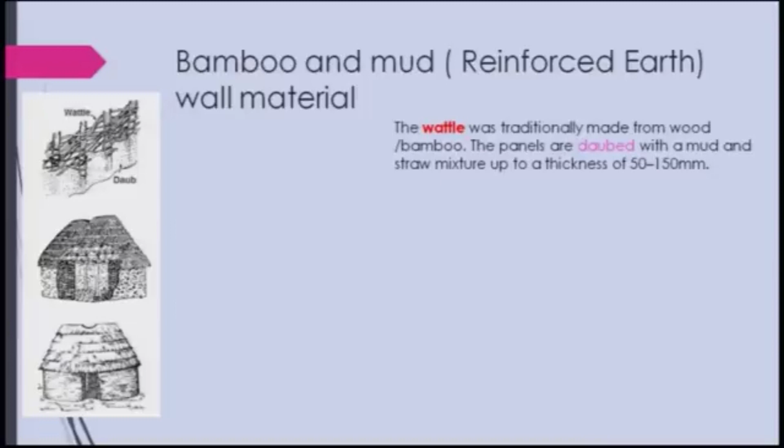Wattle is traditionally made from wood, bamboo, or other sticks which are available plentifully in that area. The panels are daubed with a mud and straw mixture up to a thickness of 50 to 150 mm, depending on the requirement.

This is what I am showing. Of course, here these are bamboos, and it can be cane also. This can be made of cane, any other reed you can think of, or any other materials.

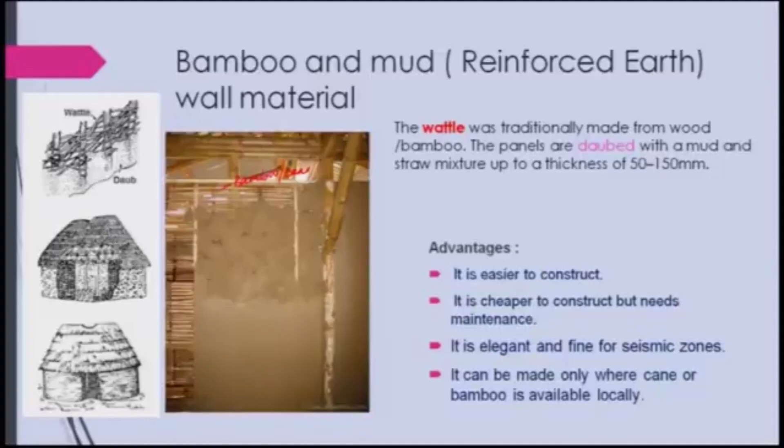The advantages: it is easier and cheaper to construct, but needs maintenance. It is elegant and fine for seismic zones, and it can be made only where cane or bamboo is available locally. You need not transport material, since transport cost is very high. Here you can have it in your own backyard if you can grow it. Bamboo grows in 2-3 years, enough to make your house, and even if you take one bamboo out of the tree, it will not spoil. That is the best part of bamboo.

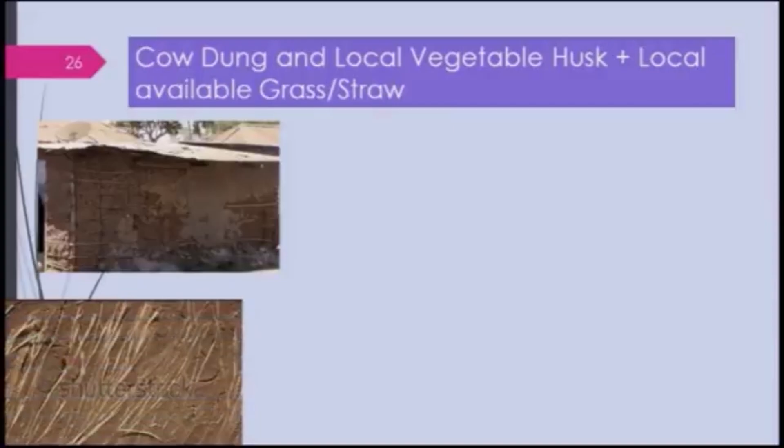Cow dung and local vegetable husk, grass and straw can be used, as shown here, along with the mud. They can use local materials, and this rice husk is being used. This is basically rice husk.

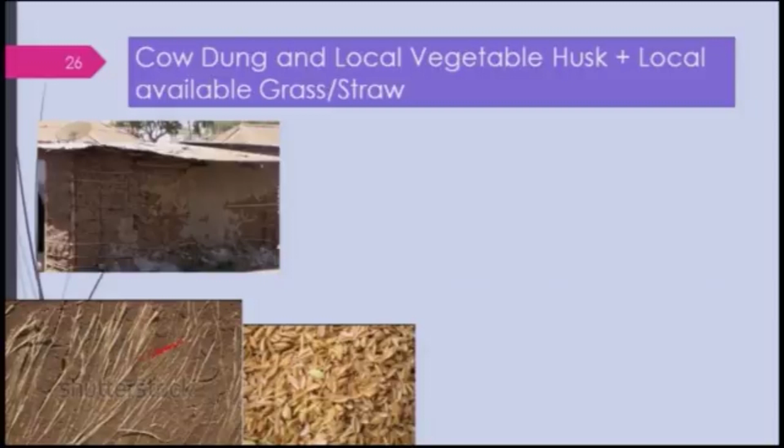Rice husk is a good insulating material. It is generally applied to the outer layer of mud plaster because it is water repellent. Even if water falls on it, it will not erode the mud. That is why rice husk is used very much.

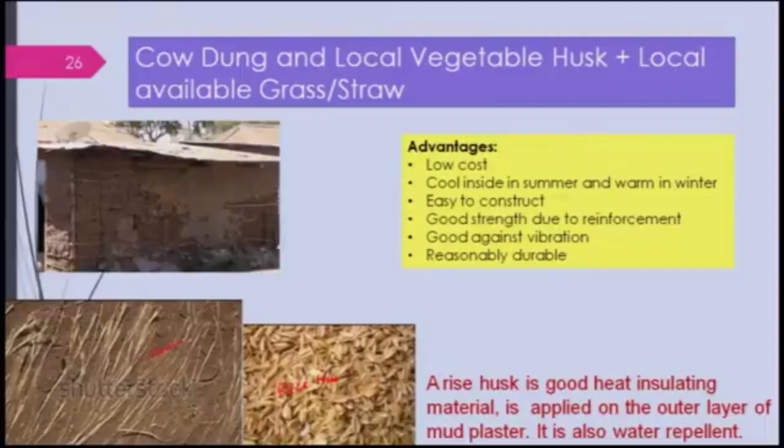Of course, the advantages are similar: low cost, cool inside in summer, warm in winter, easy to construct, good strength due to reinforcement, good resistance against vibration particularly in earthquake regions, and reasonably durable if you add sawdust and other local materials. Disadvantages: it can disintegrate if there is permanent moisture issues particularly in coastal areas, and it can wash out in floods and is fire susceptible.

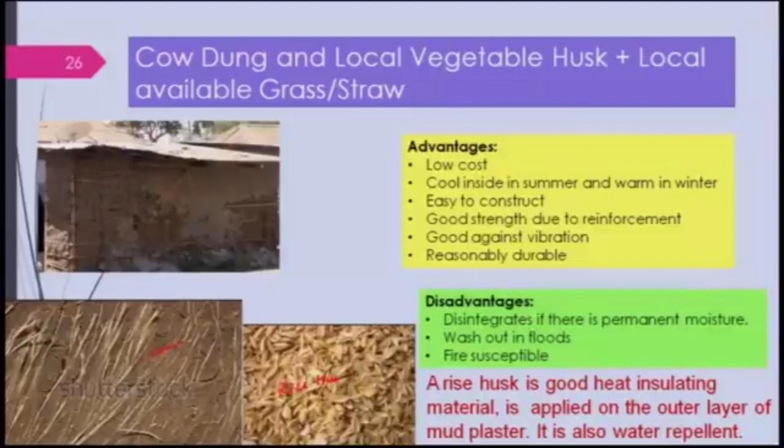That is the one bad thing, but when you use mud it will not affect that much.

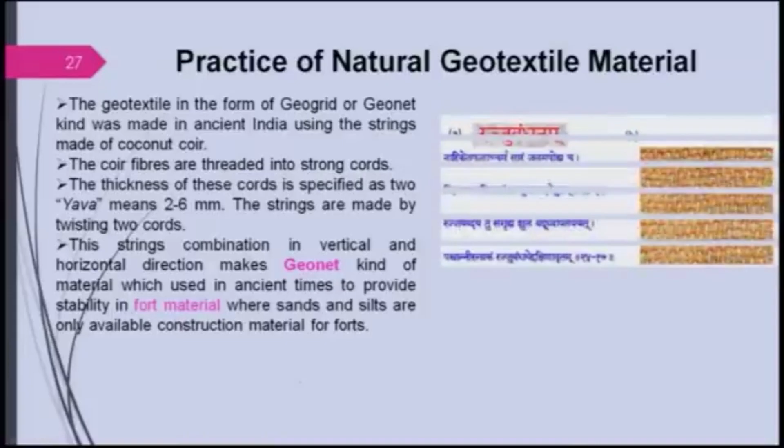There is a practice of natural geotextile materials, in the form of geogrid or geonet, used in ancient India with strings of coconut coir. These are nets made out of coir, where the coir fibers are threaded into strong cords, which can be 2 to 6 mm. This can be used horizontally, vertically and otherwise, and was used in earlier days even in fort construction.

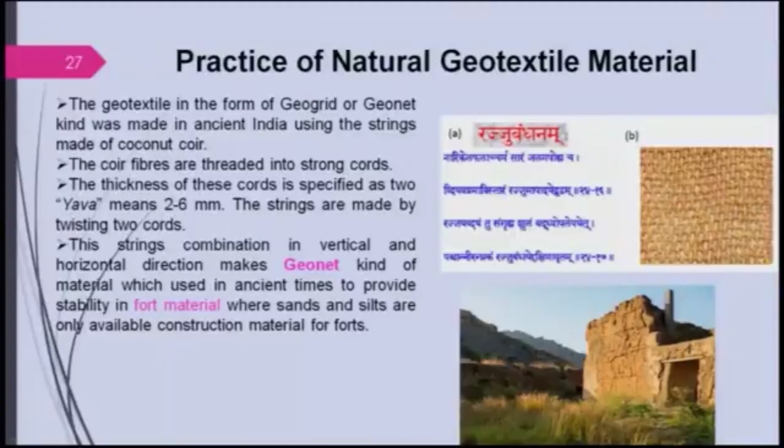This gives good strength and durability, and where only sand and silt are available for construction material and stones are not available, you can use this as a substitute.

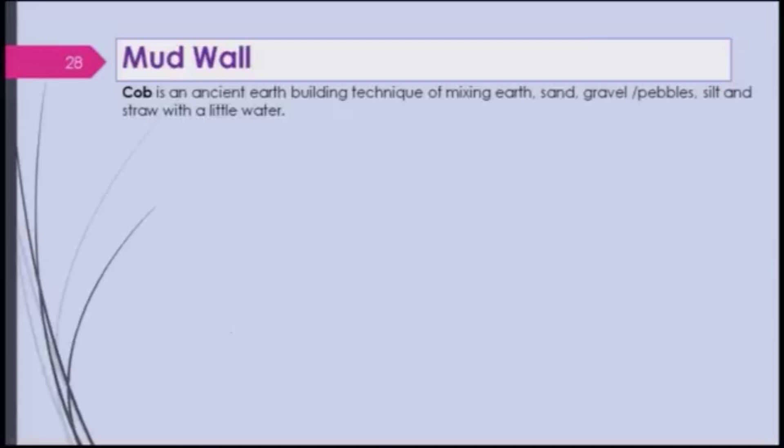Mud wall is basically an ancient technique, also called cob by some people. Cob is an ancient earth building technique, mixing earth, sand, gravel or pebbles, silt and straw with a little water. The proportion is important, and I have shown you this mud wall. This house is existing today in UP, from one village I visited. They have made a very good house, though there are a little bit of cracks here that one has to maintain.

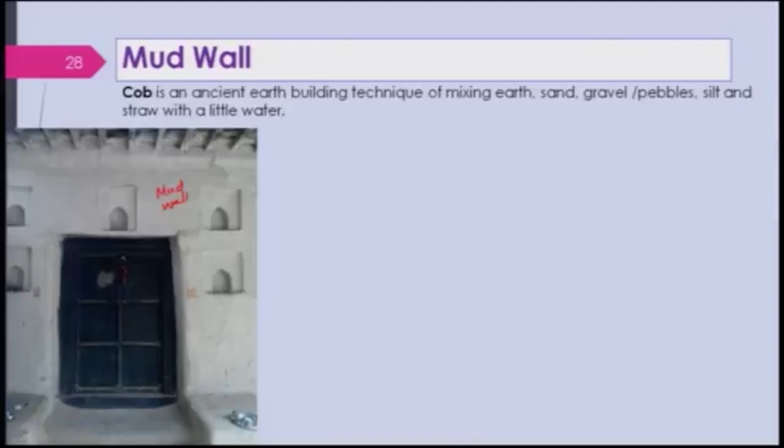And if you look at the good soil for this wall, it will be gravel around 15%, sand 50%, silt 15%, and clay 20%.

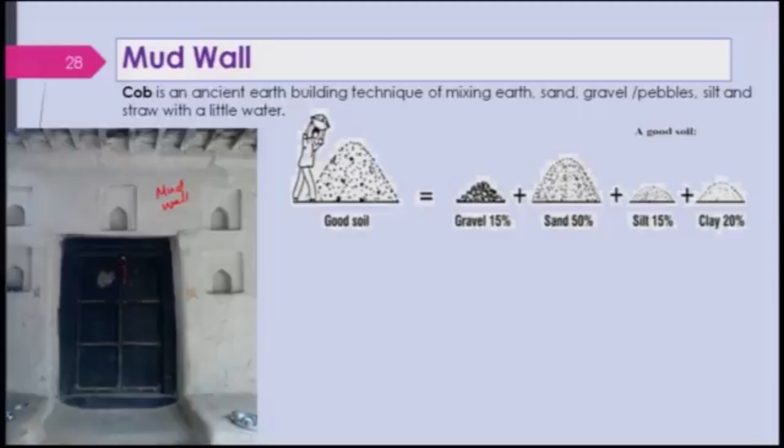But you need not worry about this much, this is of course better if you could get it, but people who are using this will be knowing, they can test it by hand, by their own judgment. Most of us do not know which is good or bad because we do not have experience, but those who are using it also apply judgment.

And it is low cost, if available locally, and less skill is required, and appearance is aesthetic and natural, that is a good thing.

And I will show you also how we have improvised this wall, with structural capability, heat and sound insulation, fire and vermin resistance since mud is good and will resist fire, and durability and moisture resistance, unlike bamboo and other things which are problematic.

And it has breathability, it can breathe moisture and air, and is less toxic in nature. Because if you look at modern days, we use paints that are very toxic, and we are not aware of it, but mud keeps the room cool and healthy.

And of course, disadvantages: less bonding between the mud and big pebbles if you are using them, so you will have to use the proper size of pebble, not easy to handle after a certain height. But if you look at history, particularly in other countries, they have built very big houses, even 3-4 floors, and big mosques in Iraq and Iran, though these can be affected by flood and torrential rain.

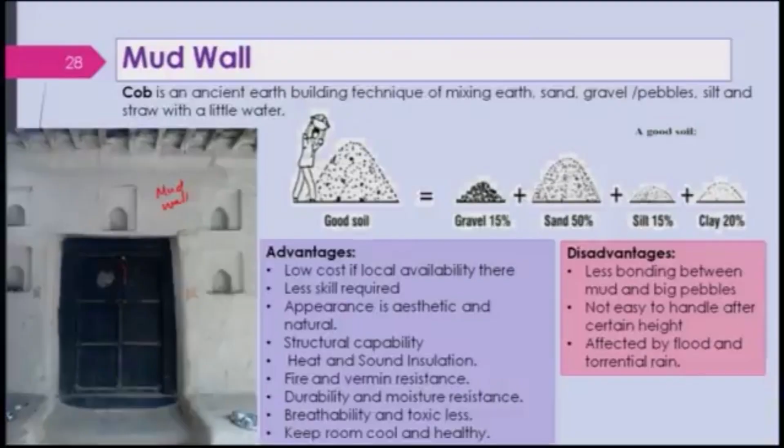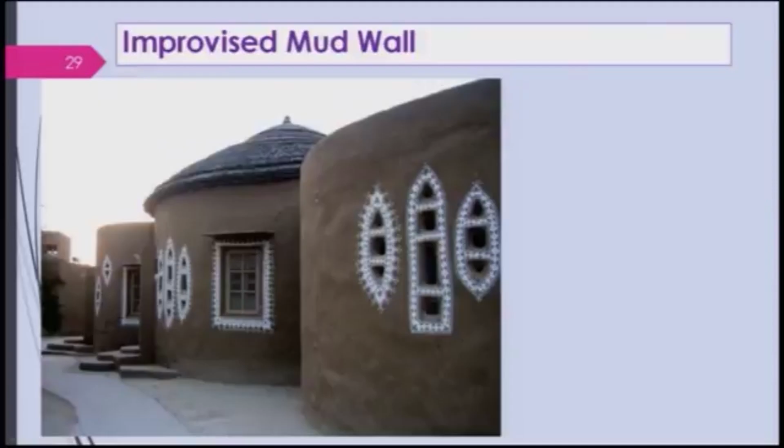Let us look at the improvised mud wall, which you can see looks very nice, and of course they are using some binding material here, one can use Portland cement, and also one can use lime and other things.

I will be also talking about the compressed wall a little later on, where you can get very good strength and stability. This is another one, interior and exterior, you can have nice things, you can't think that this wall is made out of mud today.

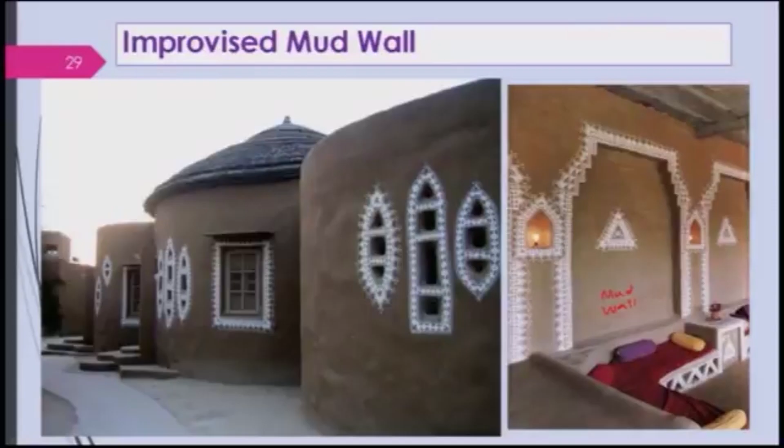So what I want to emphasize is not that we will just look at them, but that we can improvise and use it today. That is the point we should learn from this lecture, and from our ancient wisdom.

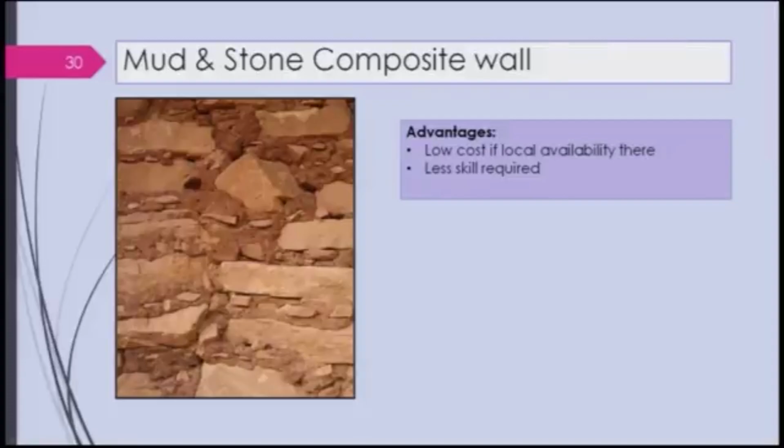Mud and stone composites, you can have stone joined together, but these are not sized stones, they can be any size. I have shown this as one way, but it is not good, you should have a proper size, and then you can use mud as a mortar, a joining or binder, which is low cost if locally available and requires less skill.

And the disadvantage is less stability against vibrations and other things. History shows maximum failure during earthquakes because these are not very stable, but if it is stone, at least it will be stable.

Properly dressed stone, properly placed with certain weight, like your temple structures, but these are not like temple structures. For temple structures there is a proper standard maintained, but here there is less bonding between mud and stone, and it's not easy to handle after a certain height, because different shapes and sizes of stones are being used. So that is not really a very good one to adopt.

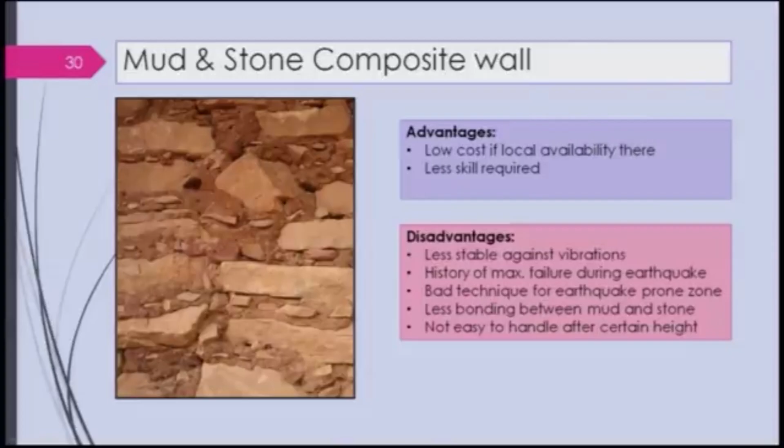So let us look at roofing materials. Roofing will be of several kinds: thatched roof, bamboo or wood roof, stone and brick roof, handmade tiles, bamboo corrugated sheets and other materials. There are several kinds, and it may vary from region to region, and what I am showing is just the tip of the iceberg.

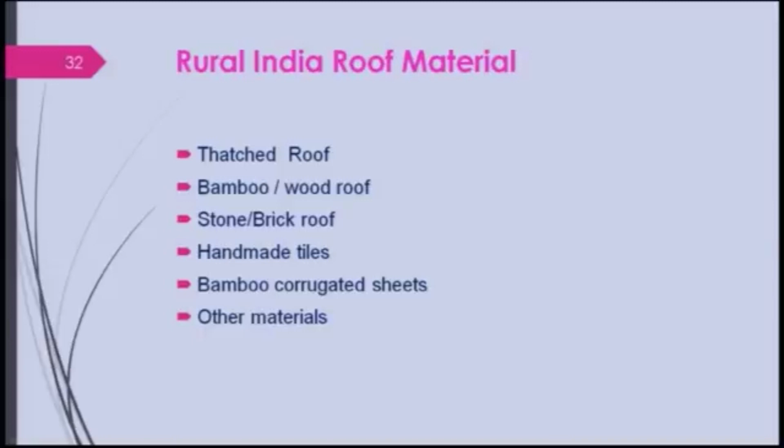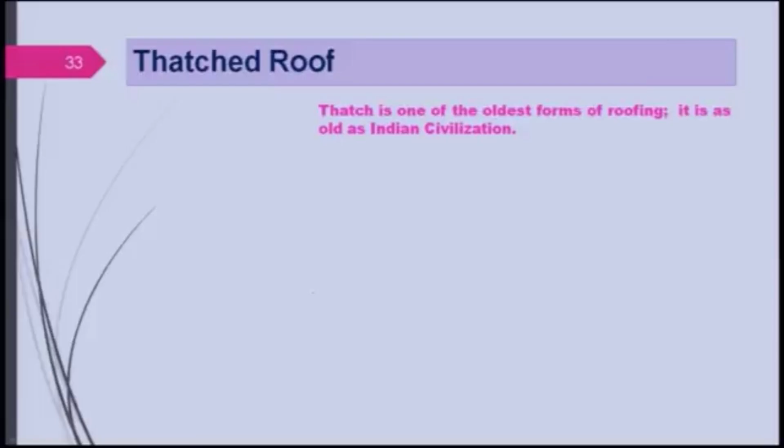There are several things in this country, and thatched roofing is one of the oldest forms. According to me, it is as old as Indian civilization, and we will see this later when we talk about town planning. This is one kind of thatched roof, basically a roof covering made of dry vegetation like straw, palm, water reeds, and other natural growth.

And it is a very old roofing method, has been used both in tropical and temperate climates like India, because it is a good insulator of heat, and is not very popular among people in recent times because of two factors. One is that people are very much interested to have a pakka house, that is the concrete house, and maintenance is very high in case of a thatched house unlike concrete.

Besides this, today it is more labor intensive, and even the straws are not easily available because it is costly. The advantage, of course, is when it relates to agriculture, then it is economical, lightweight, and a bad conductor of heat. But if you want to buy the straw from the market, it will be costlier. Also, people skilled to make this house are not available today. The disadvantages are: fire susceptible, less durable, and it needs to be changed periodically, maybe every 3 to 4 years, or sometimes 5 years.

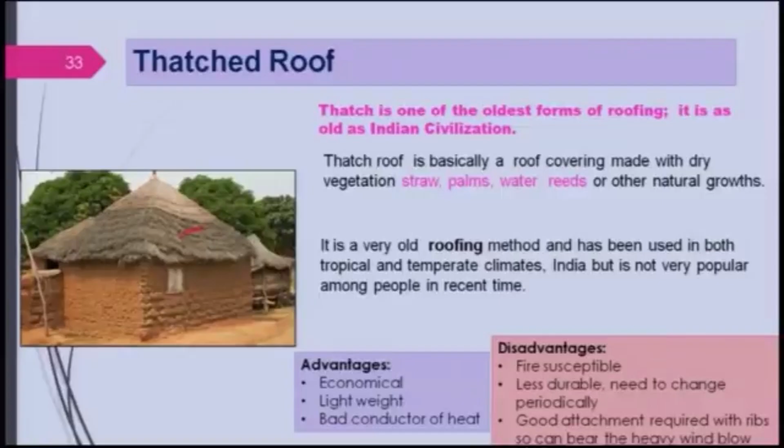Good attachment is required with the ribs so that it can bear heavy wind blow. Let us look at the basic principle of making a thatched roof. Of course, you need to have a truss, made of bamboo or wood, and it has to be done properly and designed correctly to take the load.

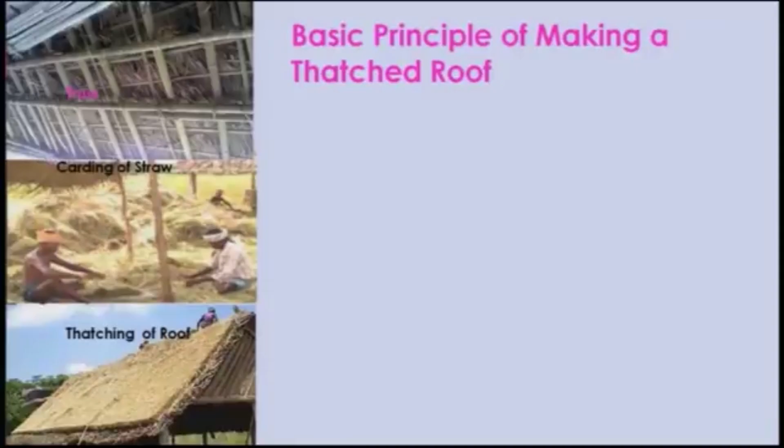This is the carding of the straw - you separate it and put it in place, and this is the thatching of the roof. A thatched roof must be as simple as possible. It should have the ability to adapt to free curve shapes - suppose you are having such a design, you can achieve that.

Thatch around 80 to 150 thick was used in earlier days, depending upon the rain, torrential rain, and other factors area-wise. The average cut length of the straw will be around 700 mm. Of course, you can manage with a lower length, though bigger will be better - the labor cost will be reduced.

The design of the truss will depend on the straw length, because the spars you will be putting, their interval will be decided by this. The straw bundle used for the roof must be strong, supple, and able to resist the effort to break it by twisting a handful continuously. Therefore, people use some kind of tie and then put it in place.

If you look here, these are the poles. Poles should be around 50 to 100 millimeters diameter, spaced around 400 to 800 millimeters apart, depending upon the design of the roof and also the truss. If it is very heavy, it will have to take the load. If a wall is there, the wall will take care of it, but in some places you don't use a wall, you use poles instead.

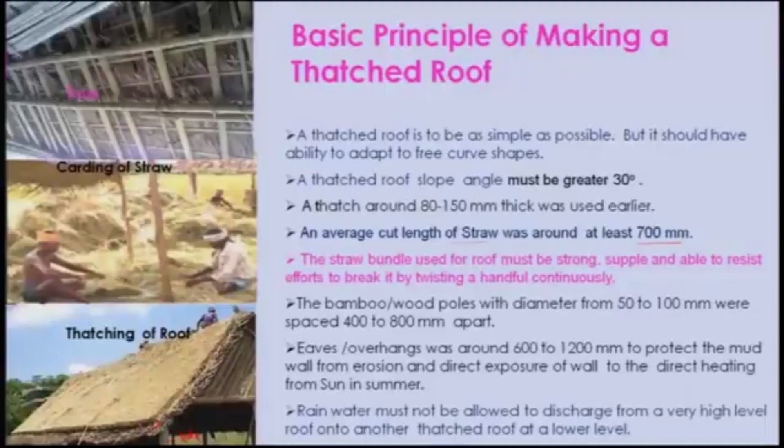Let me tell you, people designed their houses in earlier days in such a way that the height of the thatched house would prevent the summer sun particularly from entering the house, one roof over another - that is a beautiful thing which I had seen somewhere. When I inquired, they told me that as the sun moves, the shadow will fall on another roof, so that it will not be heated as much.

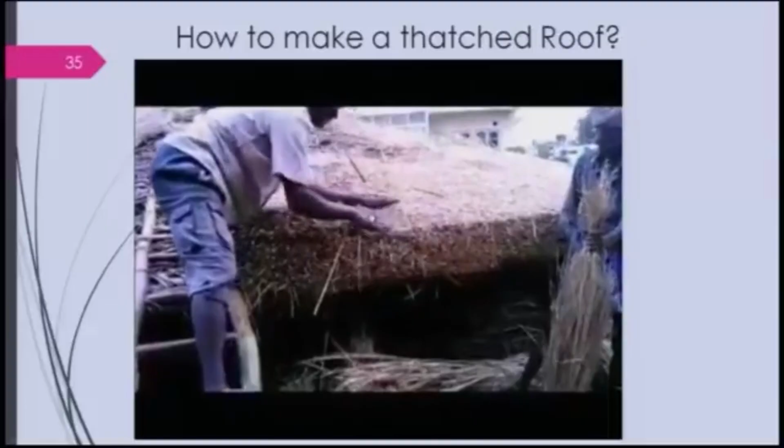This is the bundle of straw, right, and depending upon the length required, which will be dependent on the distance between two spars, which is not shown here. And unfortunately, the people who are skilled enough to make thatched houses are not there today. So, that is the problem today.

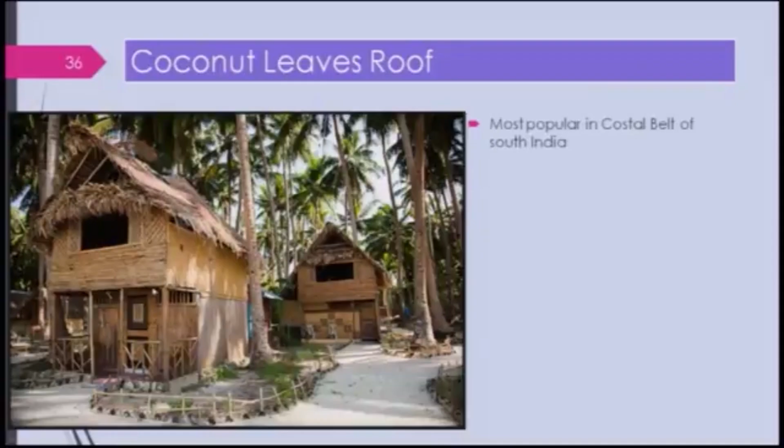Of course, there are several other things like coconut leaf roofs, which are being used particularly in the coastal belt of South India. If you look at this, a 2-storied building having a coconut roof here, and here they might be using wood planks or maybe a mud roof, and mud timber flat roofs.

Indian mud roofs are normally flat with mud bricks on supporting platforms of wooden planks, reeds and bamboo matting, palms, or even coconut leaves, any matting you can use, right. And sometimes people also use brick and mud, apart from wood planks.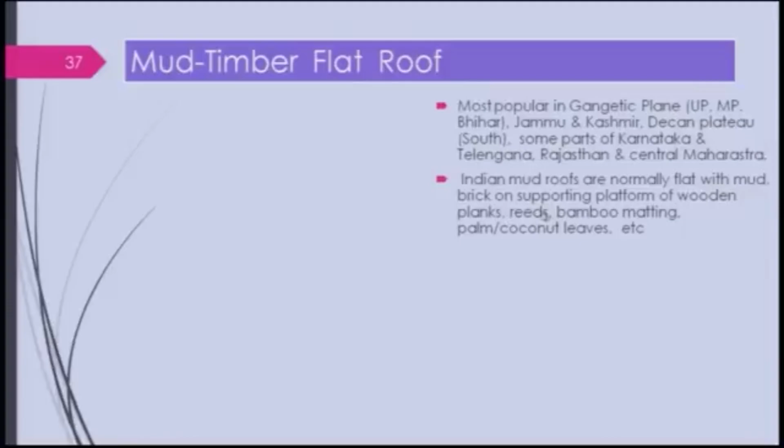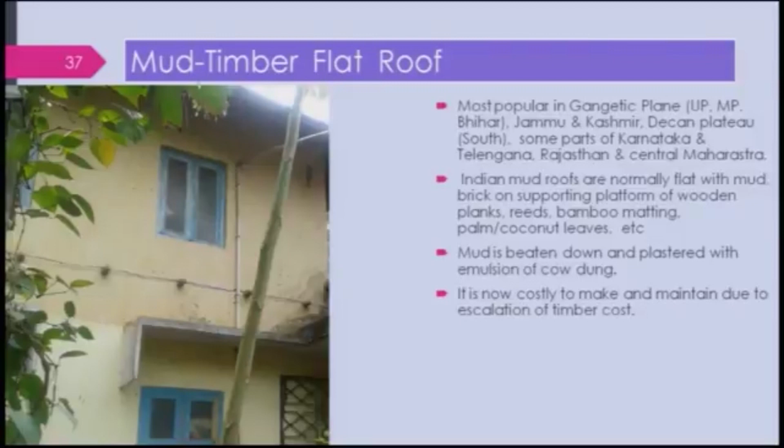And let me show you a house here. This house is around 40 to 50 years old. My student who is residing in Trivandrum sent this; it is his own house in a rural area, and it has been modified later on. The roof is basically a mud timber flat roof, right.

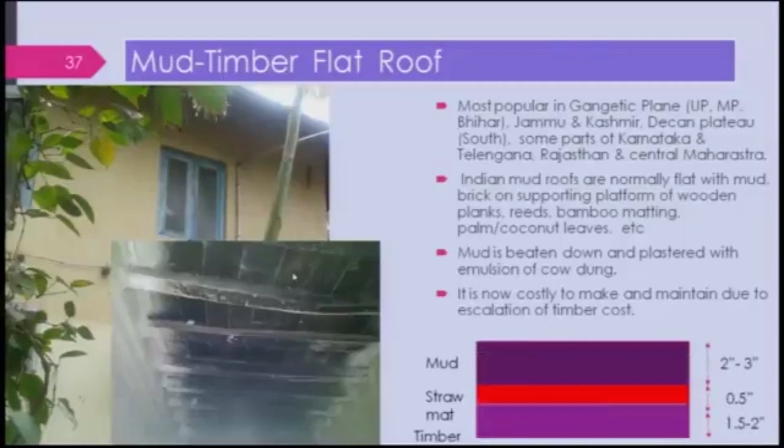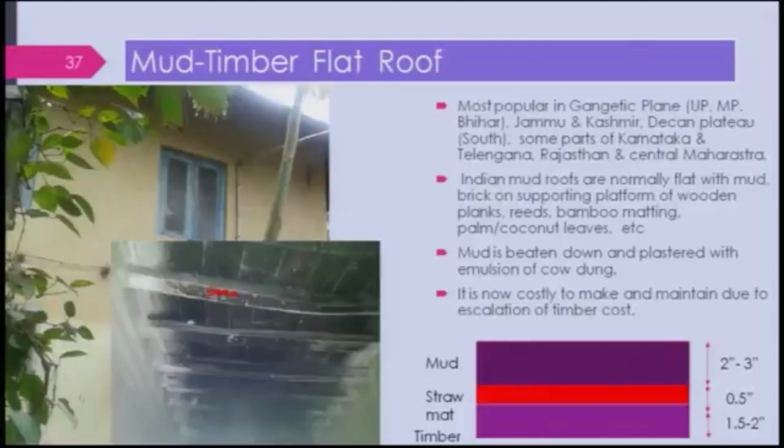If you look at this, these are the planks, and this is the beam. This is your beam here, and these wooden planks are used. The timber or wood plank will be around 1.5 to 2 inches depending upon the load coming on it. It may be more than that; I have shown it as typical.

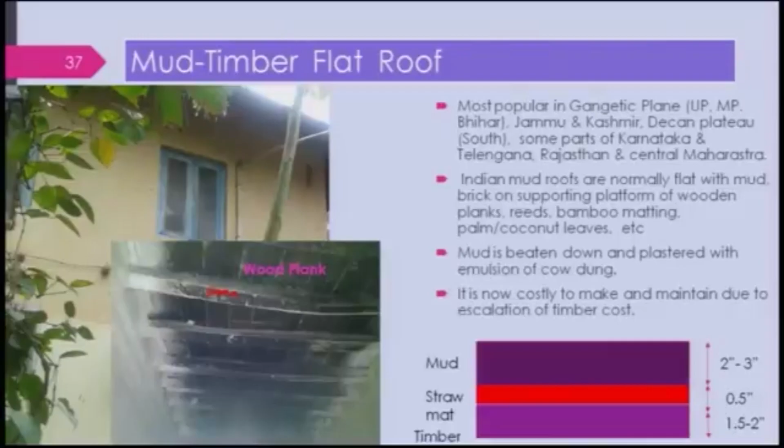And there is a straw mat or maybe bamboo mat given, such that it will soak any water passing through the mud, because in the rainy season the mud may absorb some water. So the timber should not get affected by that. People say its life is around 100 years, and some even claim more than that. I do not know, and I did not get any data.

Let us look at the advantages of using a mud roof over a cemented roof. Mud is a truly natural, cheap and local material, and it provides excellent heat insulation; the internal part of the house is cooler in summer and warmer in winter. Its life is around 100 years. I have talked with several people and arrived at these years, whereas the life of a cemented roof is around 50 years, cement you have to buy from the market, and it is poor for heat insulation. It acts as a heat source.

You might have observed when using the ceiling fan in summer, a lot of heat comes from the top towards your body, and it is unfortunate we are using that ceiling fan. Instead of cooling ourselves, we are taking the heat from the cemented roof and bringing it down. It is foolishness to do that. One has to have a false ceiling, so that this heat does not come, but we are not using it. Then after that you use the ceiling fan.

Also, the mud in a mud roof can be recycled, and so can the planks and other things; it is reusable. Concrete can be used one time, and it uses a lot of energy. For mud, no energy; you just dig it and use it, or use mud from ponds or other places. Concrete cannot be recycled. Dismantling cost is low, but for a concrete house dismantling is very costly, and construction cost is very low because any ordinary person can do it.

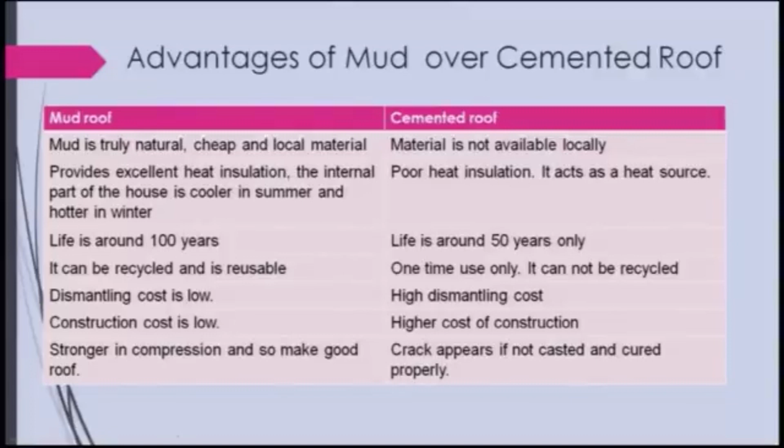Here you need a specialty, a higher cost of construction. Mud is stronger in compression, so it is very good for the roof. That means mud is a very good material for the roof, whereas in the cemented one a crack may appear if not properly cast and cured, and also the cost of construction of a concrete house or cemented roof is very high.

And of course, there will be disadvantages. Mud is eroded easily by water, mud has low strength, like it behaves poorly in the event of earthquake, and of course, cemented, if you compare, it is good resistant to earthquake, provided it is not very severe, low range Richter scales. If it is low, one can manage. If it is high, then it will be devastating.

And high maintenance is required; after certain intervals of years, one has to maintain the mud roof. And so also the concrete one can do, otherwise seepage will be a problem. And mud soaks up rain water and becomes very heavy, and of course, cemented roof won't soak the rainwater.

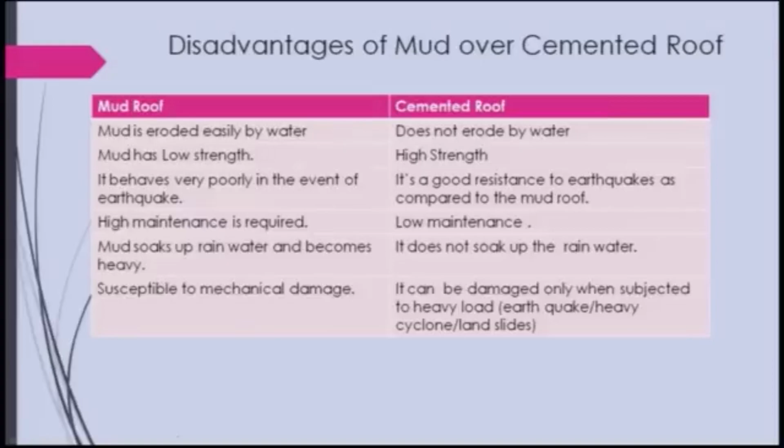And mud roof is susceptible to mechanical damage, whereas the damage due to the mechanical forces in case of concrete is not that much, provided the load is not that heavy. Like in earthquake or heavy cyclone or landslides, the load cannot be managed well even by the cement roof. So, therefore, if you look at it, it is having certain advantages.

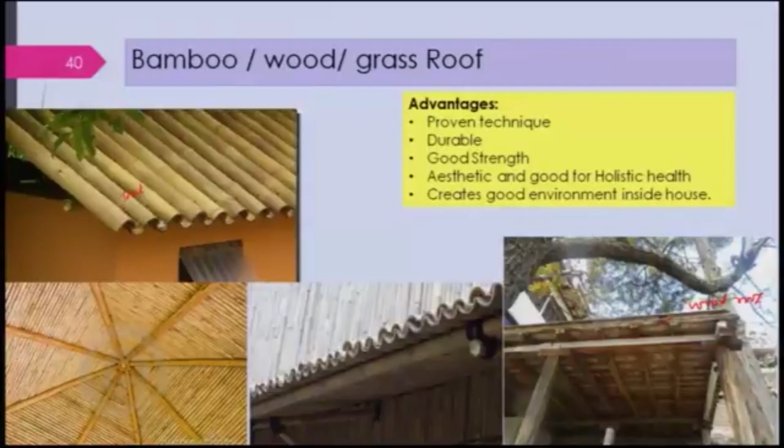And of course, these are proven techniques. It is durable, particularly when you use bamboo. Bamboo should be seasoned properly, that is also important, and it has good strength, aesthetically good, and good for holistic health, and creates a good environment inside the house. You won't feel suffocated by the concrete. So, from that point of view good, and it is biodegradable, that is a very important one, and it is eco-friendly in the sense it is not guzzling energy and creating greenhouse gases like your cement and other things, and also the iron rods.

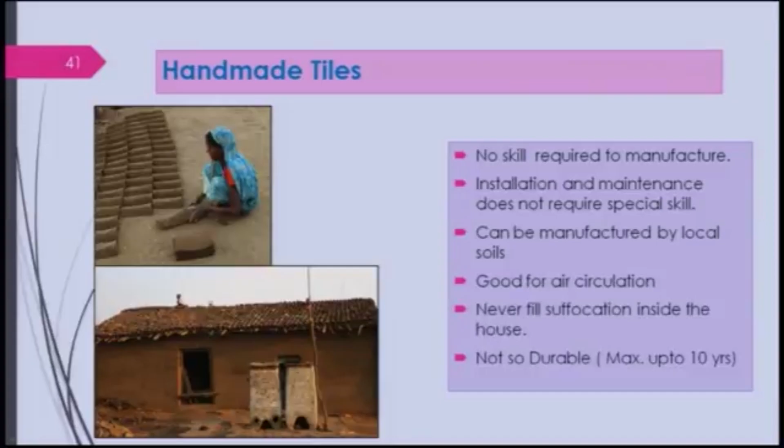So, hand made tiles, if you look at, people can make and dry it, and even they can bake it, and not much skill is required to manufacture. Installation and maintenance does not require special skill. Of course, to some extent skill is required, but not sophisticated skill. Can be manufactured from local soils, good for air circulation, and you never feel suffocated inside a house, and not as durable as concrete, but one can manage up to 10 years.

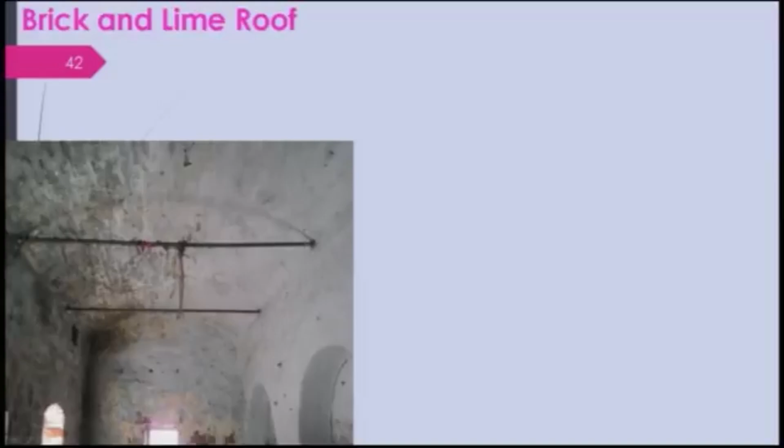And brick and lime roof. I am showing here this roof I have got near IIT Kanpur. Just adjacent to IIT Kanpur, there is a village Nankari. I got this house. If you look at, this is the roof. If you can see, this is an arch here.

Now, this arch is made, and what the person is claiming, this house is more than 60 years old, and it is not maintained properly. It is abandoned, they are not using it, they are going to dismantle it also, and without maintenance they could manage to get 60 years, and it is not in that bad condition from the look. And another question arises: this arch, how is it working?

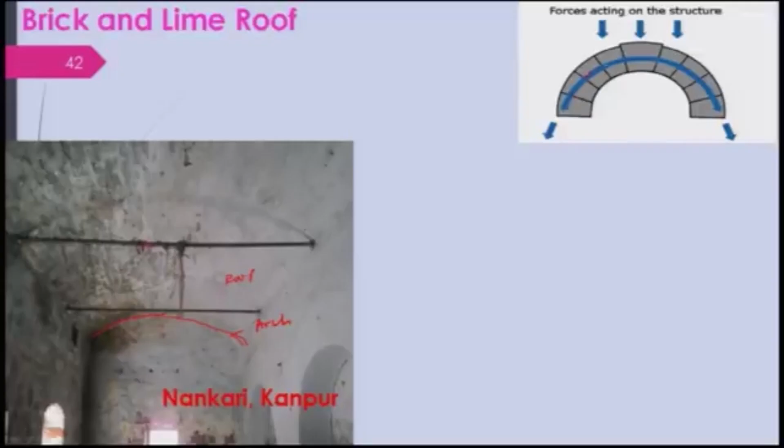If you look at, these are the forces acting on the structure, and these forces are being transferred over here, and this is a very important stone which is known as the load stone or the keystone, key brick you can say here. This will be the load brick.

And the acting forces due to the weight and also the human beings moving around, you can go for a second story building. It results in compressive stresses, because these forces are transferred this way, this is compressing, right, and in turn it eliminates the tensile stresses here nearby where it is being joined. So the force is coming, which is also known as the arch action. Because of that, it remains, and of course you can use these kinds of mortars or binders so that it will remain.

But how they might have made it? Keep in mind, this is a very large arch here, this is a very small arch here. What they could have done, they could have made a frame like this beforehand, and the frame could have been a truss kind of thing joining, so that it can take the load, and then they could have set these bricks. Keep in mind that these bricks should be a proper size, that is very important, such that the center of this will be matching with this radius. That is the important point one has to make.

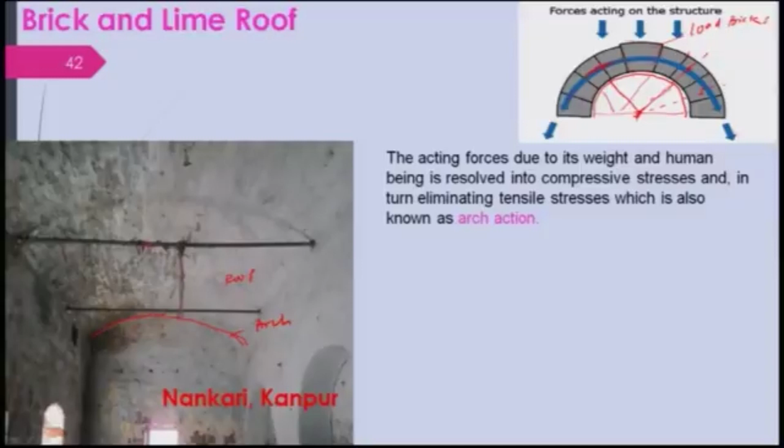Brick making and putting requires a lot of skill, and each brick has to be looking at whatever load will be coming. And this is the house which you can make with brick and lime; you can make a 2-storied or 3-storied building, people have used it. And there is another one I happened to see in Kanpur, again in a dilapidated condition, by the side of the Ganga, in Shivrajpur.

This technology is a little different. In this case it is a vertical arch, and this is the horizontal arch. If you look at it, these are all arches. Horizontal arch, right. And how it is working, they might have used a frame kind of thing, and if you look at the center, there will be some center here, some other place not shown here, and the brick size has to be properly maintained.

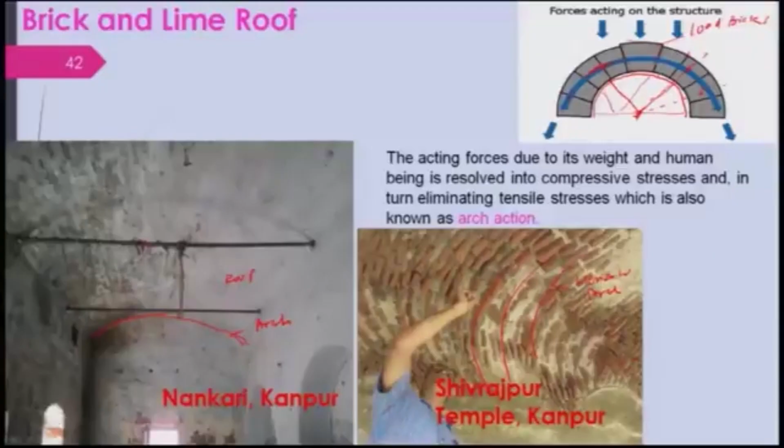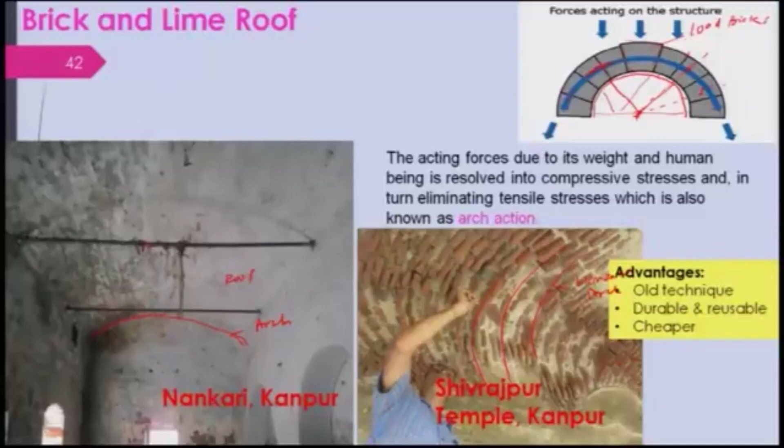So, therefore, it is very important to see that this kind of technology can be revived such that it can be used even today without resorting to concrete, and lime is far superior as compared to Portland cement, because you can make it locally and use it, and from the heat transfer point of view it has better properties. The advantage is it's an old technique, durable and reusable, and quite cheap to make, but the skill is not available today with the people. That is a very important challenge. We can revive this technology.

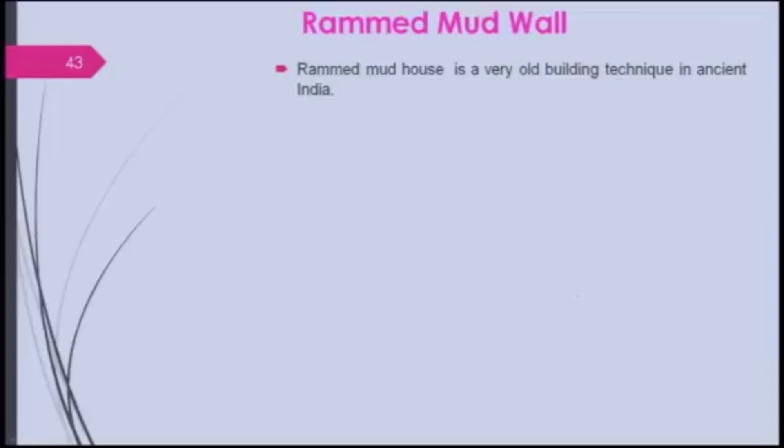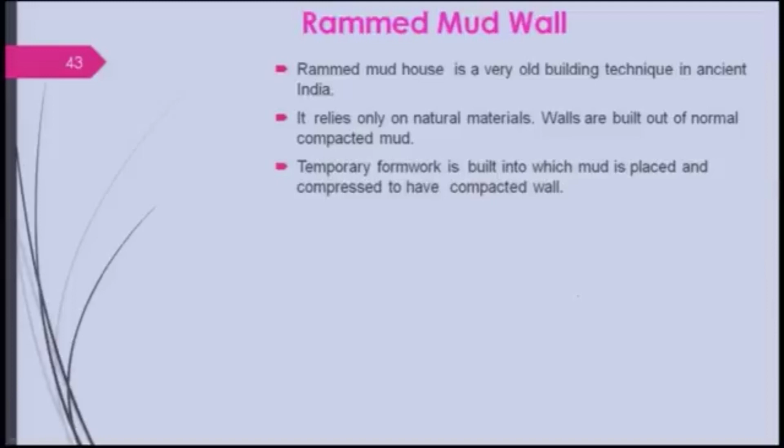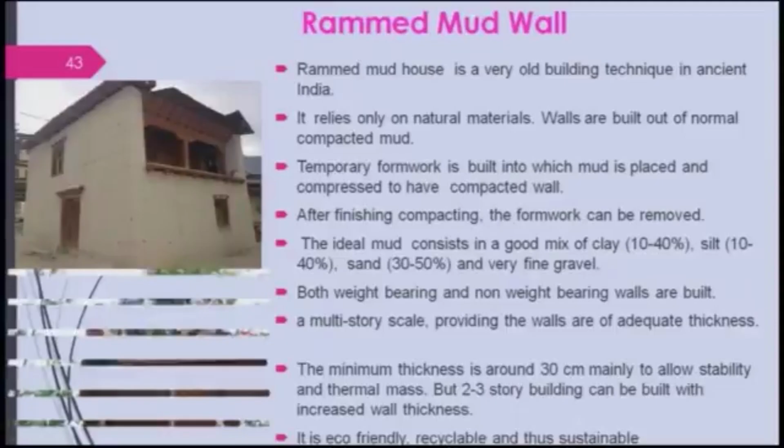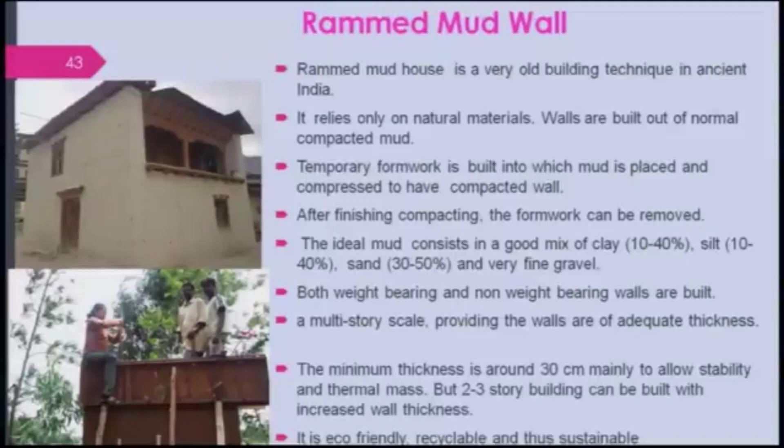So, the rammed mud wall is an old building technique. It is found in ancient India, in a little different way, and it relies only on natural material. Walls are built out of normal compacted mud, and temporary formwork is built into which mud is placed and compressed to have a compacted wall. Let me show you, this is a house built out of this compacted rammed mud wall, and this is how you can do it: you have this frame in which you ram the mud, you have a mallet here, and these are the frames which have to be supported properly, and then you ram it. This frame we call formwork. Of course, there will be a plinth level here.

An ideal mud consists of a good mix of clay 10 to 40%, silt around 10 to 40%, sand 30 to 50%, and very fine gravels, but people do use cement in modern times, and even lime can be used, and both load bearing and non load bearing walls can be built. Of course, when it is load bearing, you will have to increase the strength. Multi-story buildings can be made out of this, provided the walls are of adequate thickness, and the minimum thickness is around 30 centimeters, mainly for stability and thermal mass.

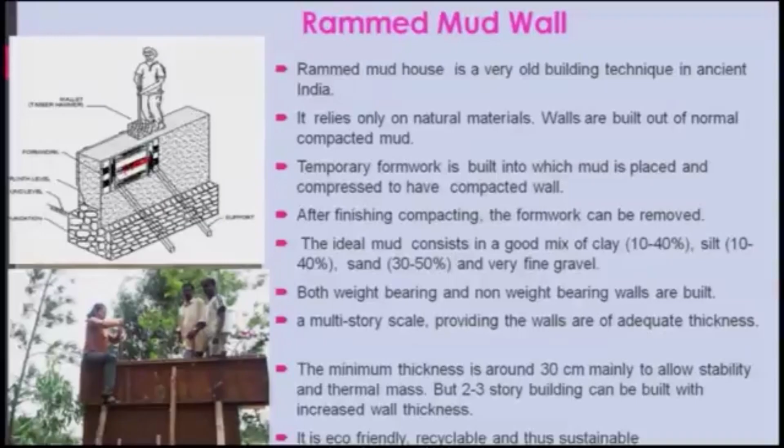Of course, 2 to 3 story buildings can be built with increased wall thickness, and it is eco friendly, recyclable and sustainable. In earlier days this kind of technology was used in fort walls, particularly outer walls made out of compressed or rammed mud, and they were using elephants for ramming the load.

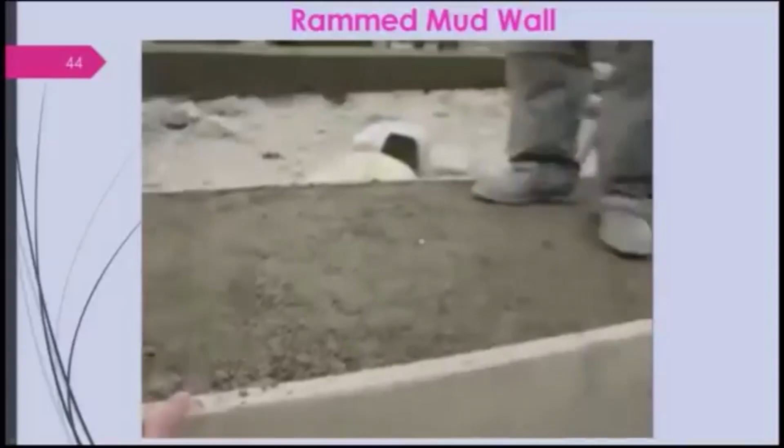Okay. So, let me show you a video just to say how it is being done, and it is done in modern time in Uttarakhand in some region. If you look at this, this is the technique they have used: there are 2 plates here, and a person is just standing and putting his own load, so that he is also pressing it.

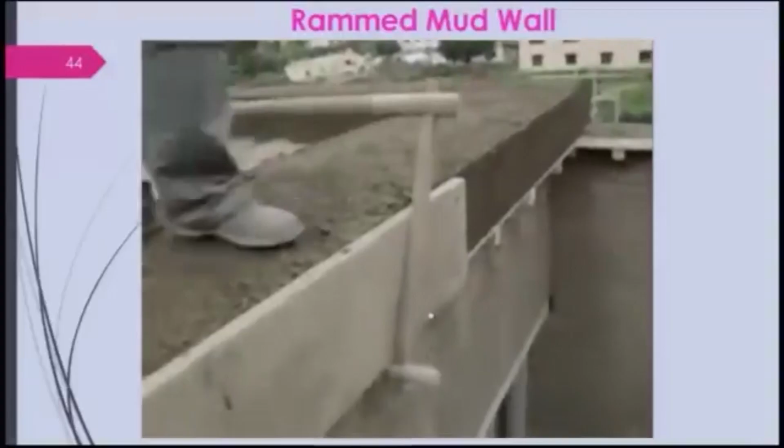And after this, of course, this is the one pressure, you can think of this as the handle of the pressure, which will be pressed by both sides of the formwork or the plank, wooden plank. So that he is doing right now, so that it will be compressed, right. Both the vertical compression and the horizontal compression have to be given, so that it will take a proper shape and be compacted.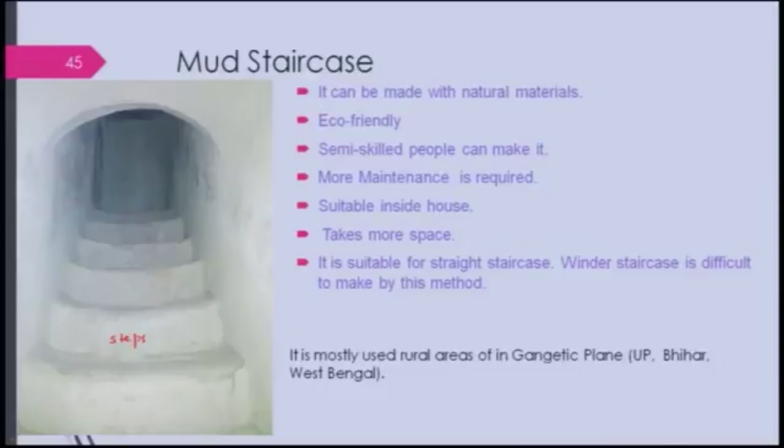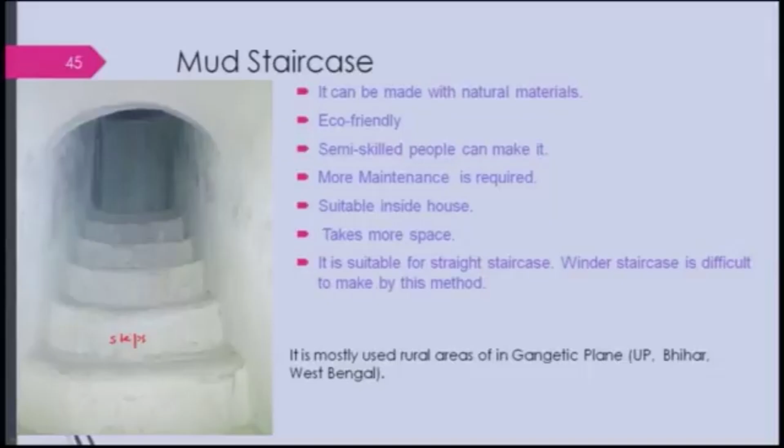It can be made with natural material, it is eco friendly, and semi skilled people can make it, and of course, more maintenance is required. It will be suitable inside the house and it takes more space, these are the disadvantages, and it is suitable for a straight staircase, but if you want to have a winder staircase like in modern time due to space, you cannot use it. However we can really improvise it, find out ways and means how to do that, and it is mostly used in rural areas like the Gangetic Plain, UP, Bihar and West Bengal also to some extent, right.

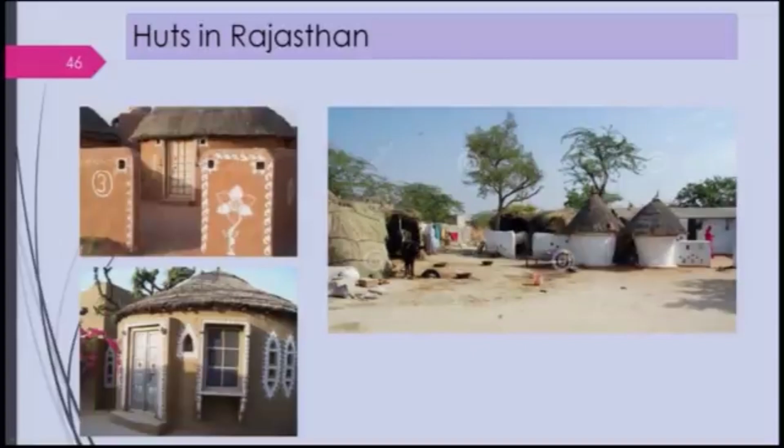And these are the huts in Rajasthan. If you look at this, a particular shape is there, and this we call a bhunga, and these are very nicely decorated walls they were having, that is the aesthetic sense they are having. And this is the same thing, which is known as bhunga houses in Kutch and Gujarat, which is basically in a seismic zone. And bhunga houses are a traditional construction type in Kutch district of Gujarat state, which has a very high earthquake risk as I told just now, and it consists of a single cylindrical shaped room, right.

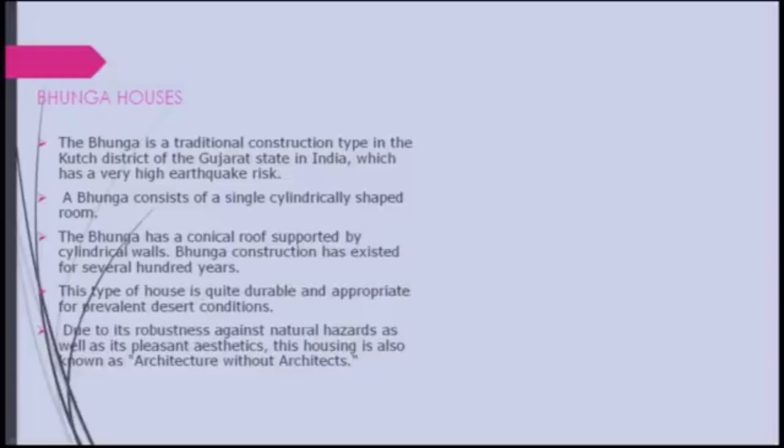Like this, it is a single cylindrical shape, it is not a rectangular shape, and the bhunga has a conical roof. This roof is like a cone, right, supported by cylindrical walls, and the bhunga has existed for several 100 years and is quite durable and appropriate, prevalent in desert conditions. This is meant for desert conditions, because any side wind will come, it will not affect it, the roof will be balanced properly, you know, that is the beauty of this house.

And due to its robustness against natural hazards as well as the pleasant aesthetic, this housing is also known as architecture without architects, right, nobody has designed it, people have made it, and it looks very beautiful, you can see. And these are some other houses which are having thatched roofs and so on, and they always indulge in painting the walls and other things, and these are also the windows they are having.

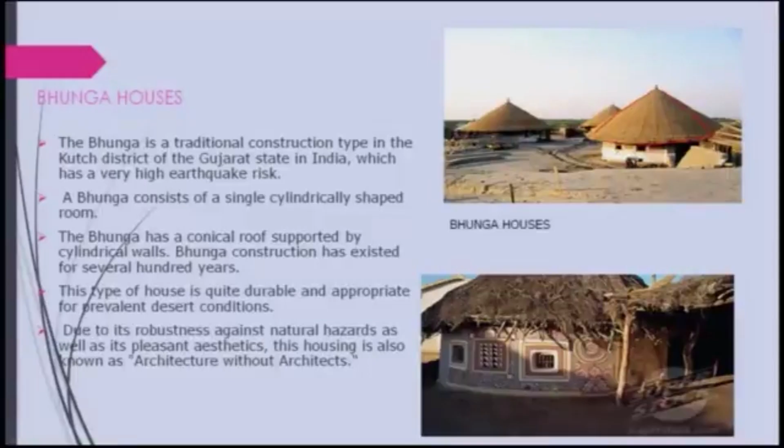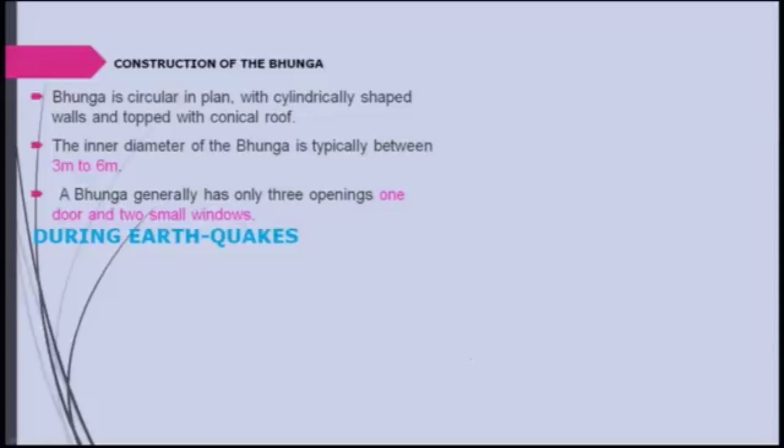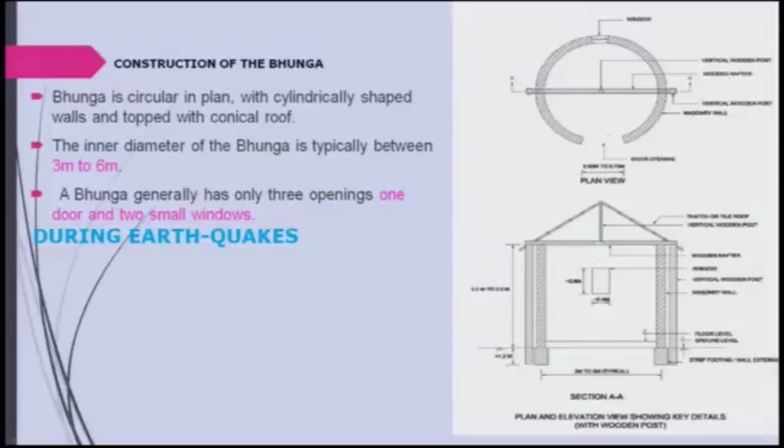And the construction of the bhunga house is basically, as I told, circular in plan with cylindrical shape. So, this is basically circular in shape, and the inner diameter of a bhunga house is typically between 3 meter to 6 meter, right, and generally this house will have 3 openings, one is of course the door, here, and there will be 2 small windows.

And during the earthquake which happened in the Bhuj region of Richter scale 7.6 in 2001, it was not really very much affected, and as the record says, very few bhungas experienced significant damage in the epicentral region, which may be attributed to the poor quality of construction material and improper maintenance of the structure, because you need to maintain it.

And why is it so? Because of the circular shape of the wall in the plan, inertial forces are developed so that they balance each other, and the thick walls required for thermal insulation have high in-plane stiffness, which provides excellent performance under lateral load. When the loads are coming, it is all balancing because of the circular shape.

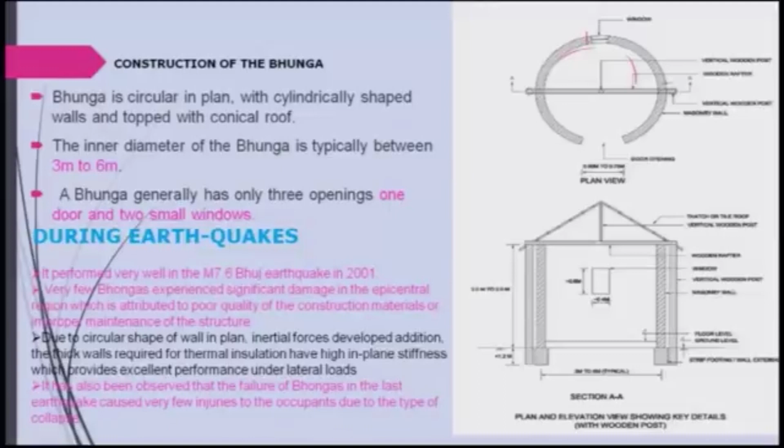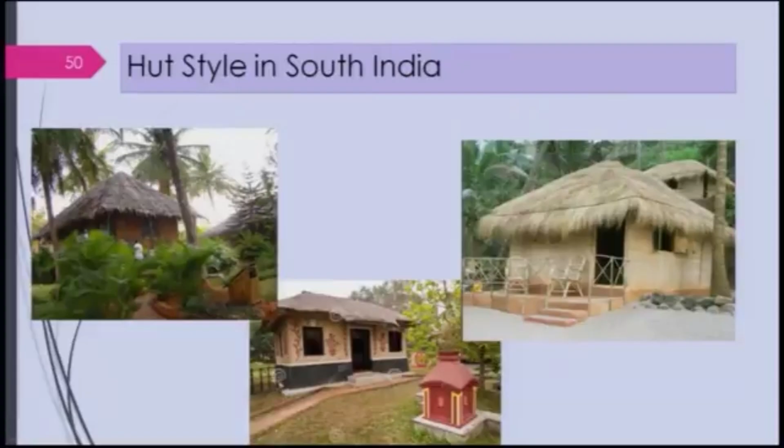And it has also been observed that the failure of bhungas in the last earthquake caused few injuries to occupants due to the type of collapse. So, this is a very good house, which of course, being a thatched house, has vertical wooden posts to make it balanced and structurally rigid. Of course, the hut style in South India will be a little different, and I have shown you different styles of huts in rural South India.

And there is one house I am thinking to discuss. Of course, each region will have different kinds of house design, which I couldn't cover in this lecture, but I will urge people to look at it, document it if possible, send it to us, and take some video and pictures of those houses of particular regions.

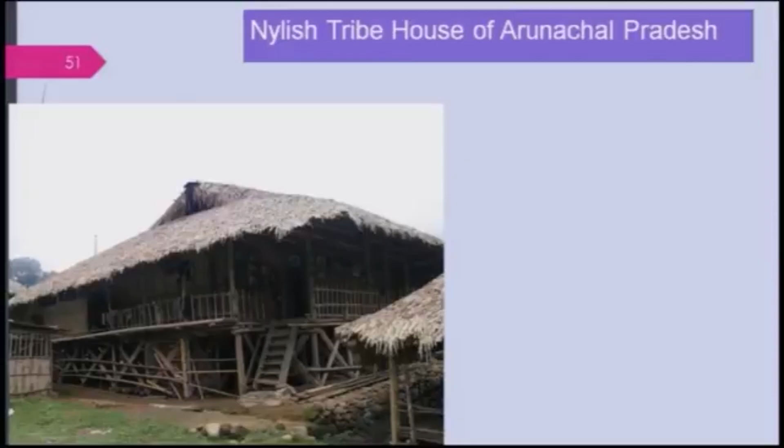And this house is typical to the Nyishi tribe of Arunachal Pradesh. The floor level is raised about 2.5 meters from the ground level, and the ceiling level is around 2.5 meters from the floor level. It is not a very strict 2.5 meters, it may vary, but generally the average is 2.5 meters. This is the thatched portion overhang, this is the V-shaped kind of thing they use, and these are all the foundation.

You can see that the plan consists of rear verandas on the back side, a common room with a fireplace, and a very important thing is how they make a fire in this wooden house. These are all bamboo houses. It does not have a floor of mud or something else. That is very interesting, which I will not be discussing, but they know how to do that. There will be side verandas, a lot of verandas. The roof is made of bamboo truss and toko leaves in those areas, and palm leaves, cane leaves, jungle banana leaves. There are several kinds of leaves they can use.

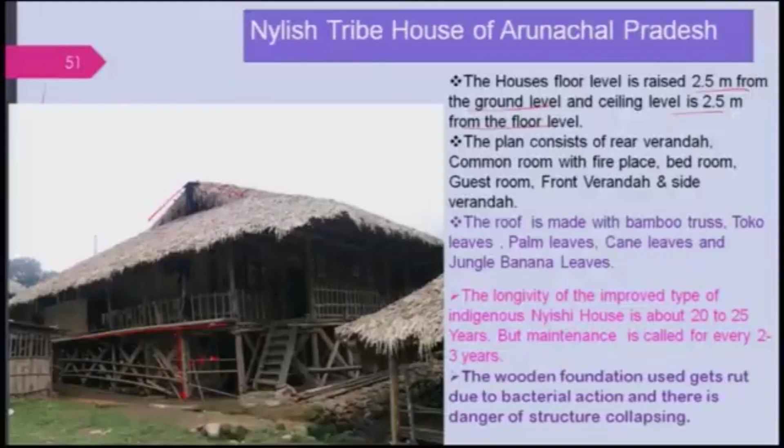And of course, the longevity of the improved type of indigenous house is about 20 to 25 years, but maintenance is called for every 2 to 3 years, like any other thatched house. And this wooden foundation gets rotten due to bacterial action, and there is a danger of structural collapse also. One has to look at it. Basically, it requires maintenance.

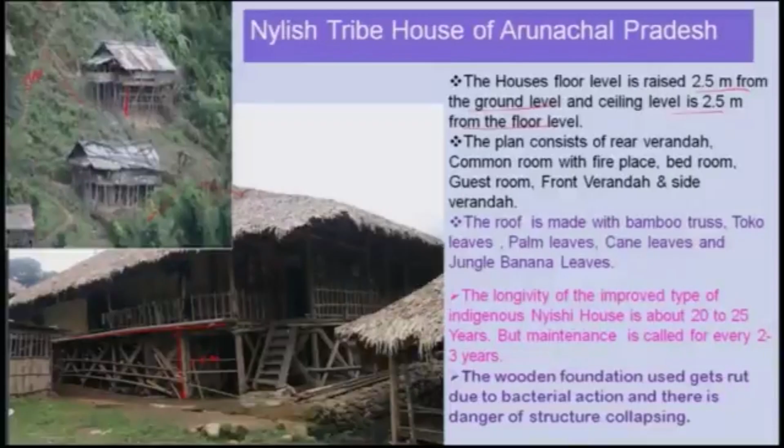If you look at these hill areas, they need to have houses like that. That is the reason why they were making them. And to have a concrete house in this region is a hell of an affair. It is not for ordinary people, you need design, and they knew how to do that. In these houses, the foundation on this side will be high because this is a slope, and they knew how to do it, and this has to be protected, and the indigenous knowledge has this. Of course, there is a ladder here to get up into the house.

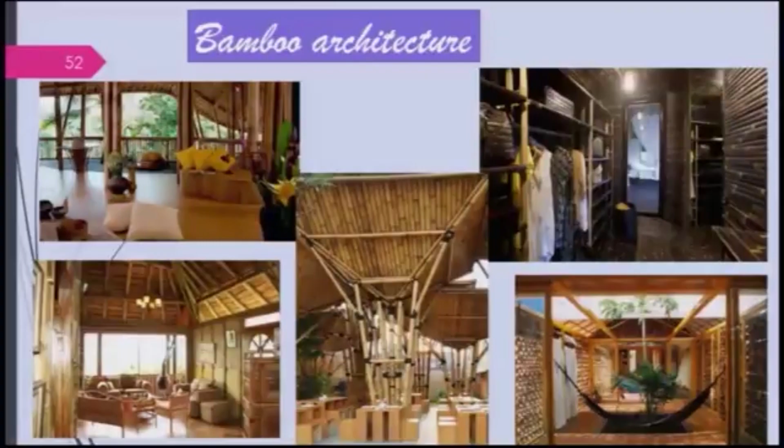And these are various bamboo architectures I have taken, not necessarily from our country, but just to show you that bamboo can be a good material.

So, thank you very much. Actually, I have just given you glimpses of housing in rural areas. It is not exhaustive, but a lot of science is involved in it, and a lot of things you can learn from it, and we need to preserve those techniques, methodologies, and also the skills of the people. And they should find out what they want to do according to their region, not copy and paste concrete and make it a concrete jungle. So, we will have to retain our heritage and culture of making houses and doing it ourselves, taking all the scientific aspects into it.

Thank you very much for listening. I hope and wish that you people will do something and at least record it and preserve it. That is important. Thank you very much.